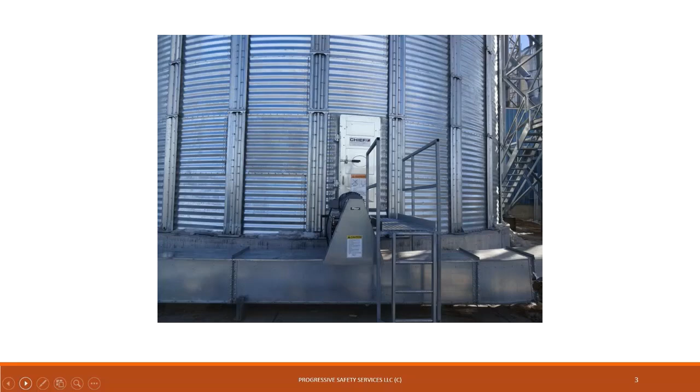I don't know the exact date of this. I'm going to say it was probably 3 to 4 years ago. One of my clients had a facility constructed. I think it was 6 steel bins, tower, conveyor, and all the associated equipment. And what had happened, and I was actually out in that state when this happened, wasn't at the facility but at another location.

After they constructed the bin, they installed the sweep auger, and before they put any grain into the bin, the company that they hired, the design build firm, had several employees that were working to see if the sweep auger was actually going to track properly along the bin floor.

I'm going to be real general because I don't want to get any of the details or give you the wrong details, but from what I understand and what I recall of the incident, they had one person that was located inside of a power room that was a distance away from the outside of the bin. They had a person right outside of the opening or the access point to the bin, and the supervisor or the foreman was inside the bin.

And they were using, I believe, verbal communication and some hand signals to turn the sweep auger on and off to see if it were tracking properly. The supervisor at the point where he was injured was actually straddling, from what I understand, the sweep auger, and it pulled one of his legs into the sweep auger and kind of wrapped his lower leg around the shaft.

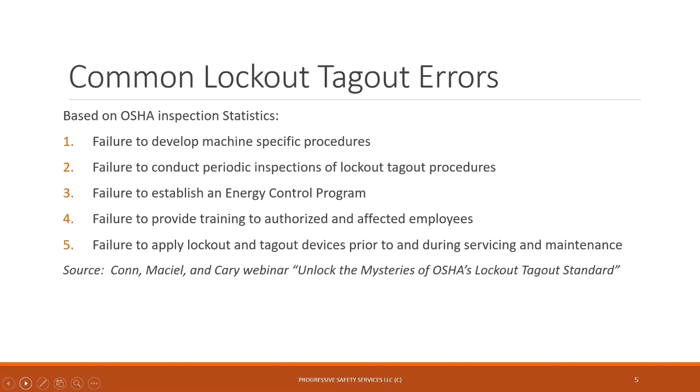And the fifth is just basically failure to apply lockout tagout in instances where there's servicing or maintenance. So I would encourage you to check out that webinar. It covers a lot of the compliance issues in a little bit more detail than we're going to cover today. I thought it was excellent. So again, that's on their website.

So what is lockout tagout? It's specific practices and procedures to safeguard employees from the unexpected energization or startup of machinery or equipment, or the release of hazardous energy during servicing and maintenance. So you'll see this term unexpected and servicing and maintenance quite frequently, and we'll talk more about that as we go through today's webinar.

But one of the things in the Conn, Maciel, and Cary webinar that I found interesting is that the word unexpected is italicized in OSHA's standard. And I believe what they mentioned was it's the only word that was italicized in the standard, which is meant to put emphasis on it. And there's actually an effort that's ongoing with OSHA to take out some of the ambiguous words or words that might be a little confusing or be up to the interpretation. But the stance with unexpected is it's truly unexpected.

So for instance, if we were doing some testing on a machine or something of that nature, and they were going to turn it on, normally it would be we were going to remove a guard, something like that, and the person was in the area and they were warned in some manner, whether it's an audible alarm, somebody on a handheld radio, flashing lights that the equipment was about to start, that is not really deemed as unexpected.

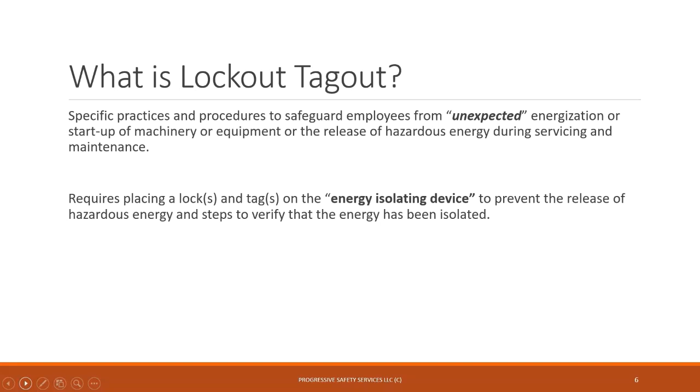The second piece here is, it requires the placing of locks and tags on an energy isolating device to prevent the release of hazardous energy, and then have steps to verify that the energy has been isolated. So when we talk about an energy isolating device, this is another term that's common. It's a definition. It's the device that physically prevents the transmission of energy. So energy can come in many forms. Most commonly, we deal with electrical energy, so it might be something like a circuit breaker or an on-off disconnect. It could be a valve for pneumatics or hydraulics as well. So that's what an energy isolating device is.

So the standard covers a lot of what we call servicing and maintenance. Again, that word unexpected comes up as well. And really the focus here is to prevent harm to employees. Things like the injury that we just talked about. You may be aware of amputations that have happened because somebody didn't lock and tag out a piece of equipment and it unexpectedly energized, and even death.

So, in my career, I had one incident, and it occurred probably 5 years ago now, where an employee entered a grain tank. It was a hopper bottom tank, not too terribly big. They entered without a permit. They didn't get permission from their supervisor to enter. In fact, he told them not to enter, and they decided to enter anyway. And we had a cone bottom tank where one employee, when he got in there, it was wet because they were hosing out the cone to clean out some of the material.

And he slid down into the bottom of this hopper bottom tank, and there was a clean out auger there that was unguarded and running. Normally, in the past they had filled out permits, and there's always a checkbox on there for locking and tagging out equipment. In this instance, they failed to do that. This employee's leg was caught in that auger, and it took his leg clean off of his body. I'd never seen photos quite like it, the photos immediately after the incident.

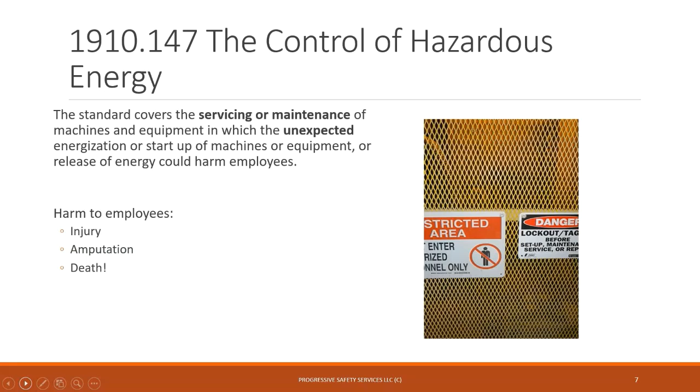So again, those are the bigger picture things that we're trying to prevent here. We're going to talk about compliance, but that's really the ultimate goal. When we talk about energized energy sources, that can mean anything connected to an energy source or containing residual or what we call stored energy. So there are stored energy systems as well that we need to be concerned about when we perform lockout tagout. And common energy sources include electrical, mechanical, hydraulic, pneumatic, chemical, thermal.

There's other springs, gravity, but there are a lot of different energy sources out there. I think, commonly in our industry, there's still a lot of equipment that you can lock out successfully with just an on-off disconnect. But there is also equipment out there that can move or shift unexpectedly as well, because there are other energy sources present.

I think they were actually just cleaning up some residual material, but they were obviously trained, because when we do an inspection and see something like this, the first question that we ask is, is it locked out? Because we've removed a safety device or a guard, in my opinion, the top cover. And we do that not to try to place blame on somebody if it isn't, but we also want to note that they're doing it successfully.

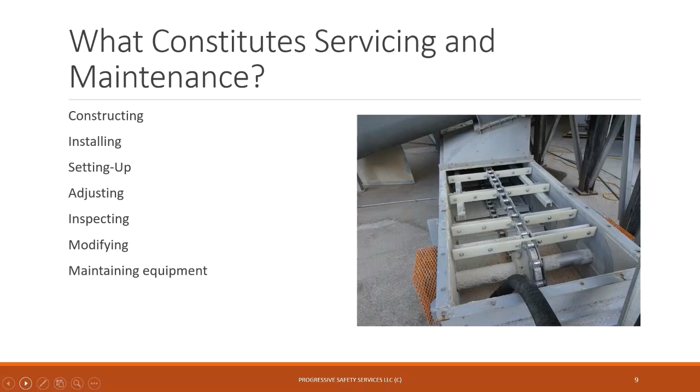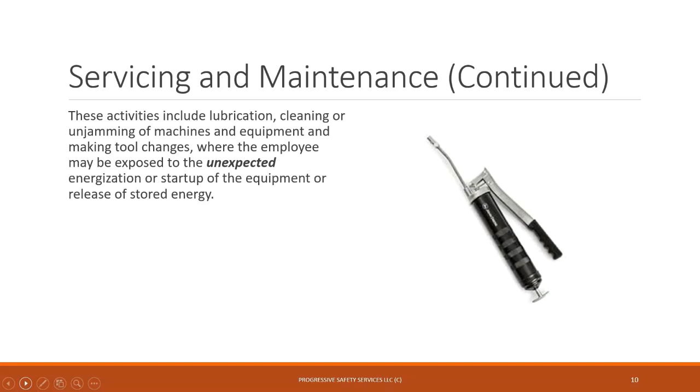So when we went to the energy isolating device for this, we found that it was locked and tagged out by a number of people using group lockout to perform this task. So they were doing cleaning, which is servicing and maintenance. Some of the other activities that would be lumped into servicing and maintenance might be lubrication, cleaning or unjamming of machines and equipment, making tool changes, and anywhere where the employee might be exposed to the unexpected energization or startup of equipment or release of stored energy. So that's during servicing or maintenance.

There are also normal operations. When the equipment in that picture I just showed you is normally operating, there's a cover over the top of it, and it prevents anybody from coming into contact with the hazard. So normal production operations aren't covered by the standard, but servicing or maintenance which takes place during normal operations is covered if an employee is required to remove or bypass a guard or other safety device.

So like the instance that we just talked about, if that cover is on that equipment, an employee can work around it. Obviously, in normal production, he's protected. No need for lockout tagout. However, if they're performing servicing or maintenance type operations and they remove or bypass that guard or other safety system, it has to be locked and tagged out.

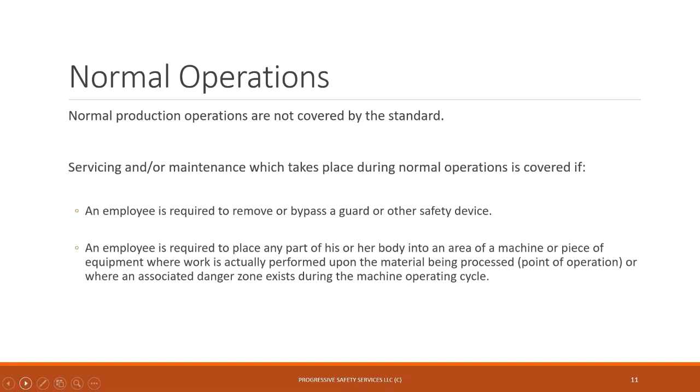Or anytime any employee is required to place any part of his or her body into an area of the machine or piece of equipment where work is actually performed upon the material being processed. That's what we commonly refer to as the point of operation, or when an associated danger zone exists during the machine operating cycle. Commonly when I think about point of operation, I think about a part or a piece of material where work is being performed to it, a hole punch or something of that nature. But although we're not really processing in all of our grain operations, with all this equipment that we use to move material, if somebody's required to place their hand or anything in that machine or somewhere into that hazard zone, lockout tagout would be required.

Now there are several exceptions to lockout tagout, two that I believe we'll speak of today, where lockout tagout is not required. Your company may not choose to honor any of the exceptions. So just as an example, I have clients that have what we call minor intervention language within their policy, and I have others that don't. Generally, the first exception I'm about to talk about is often used in production environments, and I'll give you some examples of that.

So there's an exception to performing lockout tagout during minor tool changes and adjustments and other servicing activities which take place during normal production operations. They're not covered if they are routine, repetitive, and integral to the use of equipment for production. And that's provided that the workers perform them using alternative measures which provide effective protection.

So in an effort not to confuse today, I'm going to give you an example of something that's routine, repetitive, and integral to the use of equipment for production. I've worked with several companies that have bagging operations, and they'll fill bags of all different sizes with flour, fertilizer, whatever it might be.

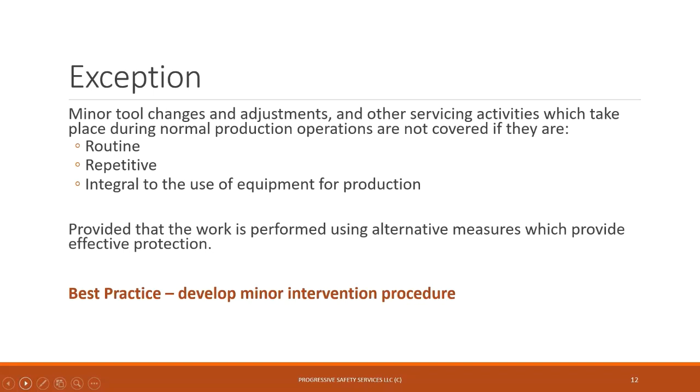In many grain operations, conveyors and bucket elevators are a little different than production, so I'm not sure how much the exception would apply to that. But if you do have production-type operations at your facility, that exception does exist.

The second one is the standard does not apply if somebody is working on cord and plug connected equipment for which exposure to the hazards of unexpected energization or startup can be controlled by unplugging the equipment from the energy source. The plug has to be under the exclusive control of the employee performing the servicing or maintenance. They have to have the plug close by or be able to prevent anybody from plugging it in while they're working on it.

There's an exception for hot tap operations and things of that nature. Quite frankly, I don't get into that line of work, but I did want to just mention that.

With cord and plug equipment, exclusive control would mean, for example, a small portable conveyor that you plug into the wall. If the cord runs around the corner and down the hallway to the plug while I'm working on the equipment, that isn't exclusive control. But if I have it in my immediate work area and could prevent somebody from plugging it in, I could most likely use the exception.

I want to make sure people understand this exception is only for corded equipment. That doesn't mean if somebody removes a guard on a V-belt drive with the on-off disconnect right next to them, that since they have exclusive control and could prevent somebody from turning it on, they could use this exception. They cannot. This is only for corded equipment.

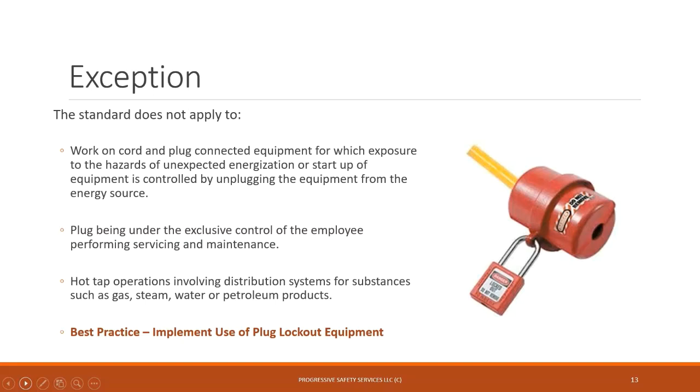So the best practice, in my opinion, is we train on this and really encourage our clients to use cord or plug lockouts for a number of reasons. One is the instance we just talked about — it can be very difficult to make sure the plug is right next to the person so they can prevent that. But also, in the event the servicing or maintenance doesn't get completed during that shift, if there's a plug lockout on it, somebody will not use it because the machine might not be safe to use. So that's one of the reasons as well.

I thought for today's presentation we'd take little breaks throughout, and I could give you a 1-minute focus on some incidents that have actually occurred out in the workplace. So I picked a few of them. I got these right off of OSHA.gov.

These are scenarios where people were actually cited for lockout tagout related incidents. The first one: at 10:15 a.m. on December 12, 2017, an employee was working for a firm that produced converted paper products, an example of slit and twisted paper. He was working with a twisting machine. While the machine was still running, he removed the guard from a pulley-driven belt to check the belt. He was using his hands to push the belt to move faster. When his finger got caught in the pulley, he sustained an amputation of the ring finger on his right hand. He was not hospitalized for that.

So another example where we had a person who removed a guard on a piece of equipment, and based on the definitions that we looked at earlier, lockout tagout is required when that happens.

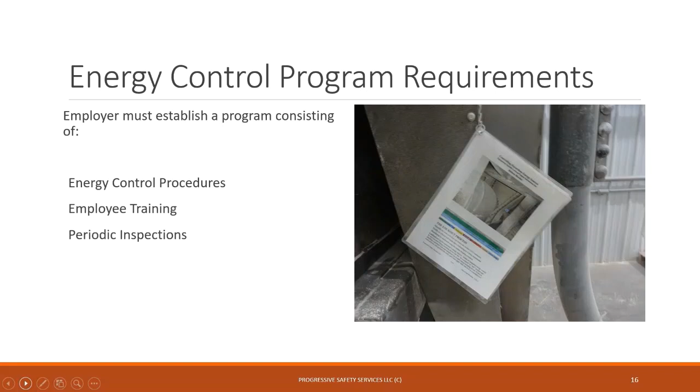So let's talk a little bit about energy control programs. Keep in mind that when I talk about the programs today, your company may go above and beyond what we discuss, and that's excellent. I'm going to talk about the things that are actually required from the actual OSHA standard. So the energy control program must consist of primarily 3 things. You may have additional things in there like provisions for contractors, but it must include energy control procedures, employee training, and periodic inspections, and we're going to talk about each one of these.

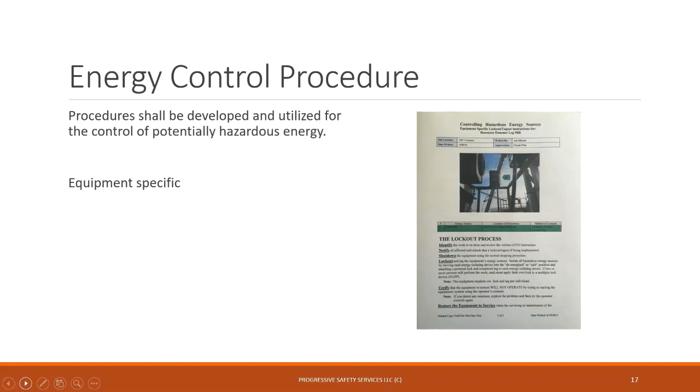Procedures shall be developed and utilized for the control of potentially hazardous energy, and they should be equipment specific. So the common question we get is, how do I know if I have to have an energy control procedure specifically for that piece of equipment? There are actually 8 criteria here, and if your equipment meets all of these, you could have a more general type procedure that you could use at your facility.

If it doesn't meet all of these criteria, then you would have to have an equipment-specific procedure. So it's really looking at the machine and then taking it through these questions or a matrix and determining whether or not it needs an equipment-specific procedure.

So the exception to having equipment-specific procedures, again, you'd have to meet all of the following: the machine or equipment has no potential for stored or residual energy or reaccumulation of energy after shutdown - if you have stored energy with the equipment, it automatically has to have an equipment-specific procedure. The machine or equipment has a single energy source which can be readily identified and isolated. The third is the isolation and locking out of the energy source will completely de-energize and deactivate the equipment.

The fourth is the machine or equipment is isolated from the energy source and locked and tagged out during servicing or maintenance. A single lockout device will achieve a locked out condition. What they mean by a single lockout device is I would have one lock and tag on an energy isolating device like a breaker. If I had to place one on the disconnect electrical, and then I had valves or pneumatics, hydraulics - that's a different story. That would require an equipment-specific procedure.

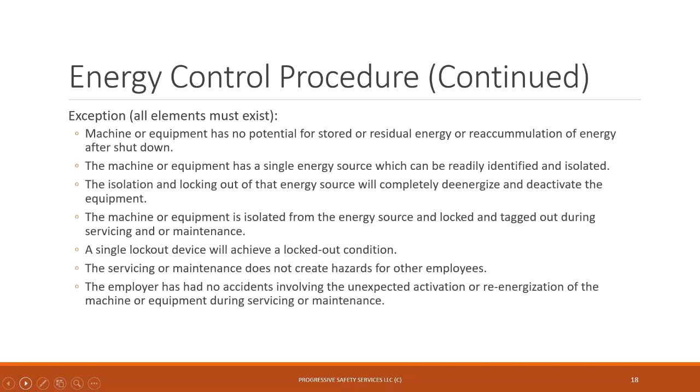If energy-controlled procedures are required in the workplace, there are some components that have to be within that procedure. They have to clearly outline the scope, purpose, authorization, rules, and techniques utilized to control the hazardous energy, a specific statement of the intended use of the procedure, specific procedural steps for shutting down, isolating, blocking, or securing machines or equipment to control hazardous energy, and specific procedural steps for the placement, removal, and transfer of lockout devices, tagout devices, and other energy control measures.

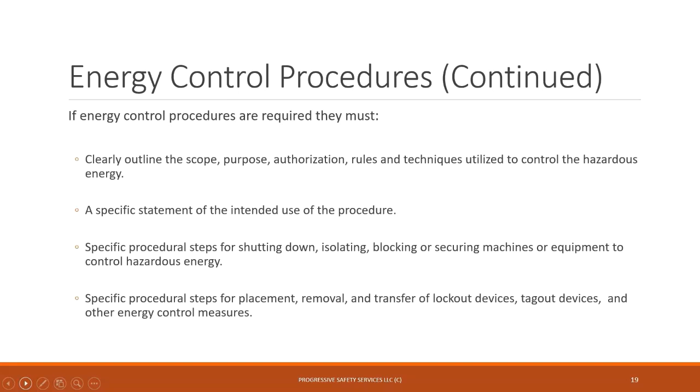So this is just a generally accepted lockout tagout procedure that we use to get started with folks. We use a 7-step process, and then we use a 5-step process to put something back into service. So altogether, our process is 12 steps.

Your company may have less, they may have more. This is, again, just generally accepted.

Step 1 is to notify affected employees. Those are folks that might operate a machine, might just be the equipment operator on which that piece of equipment is going to be serviced or maintained, or maybe they work in the general area or are required to work close to or around. So we notify them. We identify the type or types of energy associated with the equipment.

We shut down the equipment using normal operating means, stop button, PLC, something like that. Deactivate the energy isolating device or devices. We place those in an off position. We lock and tag the energy isolating devices, dissipate or restrain any stored energy that might be in the system. And then number 7 is we verify that the equipment is disconnected from the energy source.

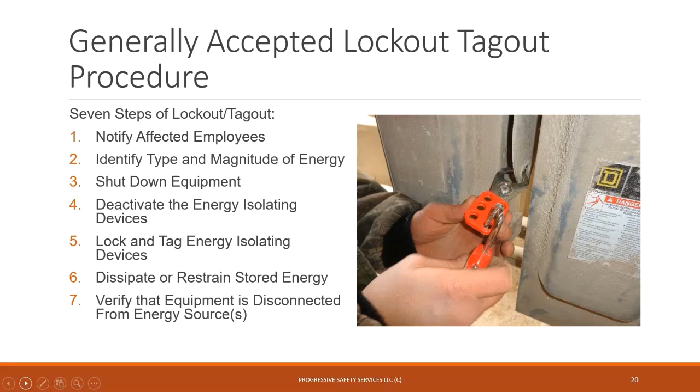So lockout, tagout, try. I find if I can get employees to just remember that quick saying, particularly with the try. So we really focus a lot with our training efforts on the verification piece. It's so important.

With a lot of our equipment, it can be as simple as pushing a start button. Now, when we remove the equipment and re-energize something, we have a 5-step process that we follow. We want to make sure that the equipment is operationally intact. We check the work area to make sure that it's safe, everything's picked up, guards are back in place, all those types of things. We verify that the controls are in neutral if there's the possibility of what we call hard start. We remove our lockout tagout devices, and then we will notify at the end of the servicing and maintenance when the devices are removed that it's safe to work in the area. The equipment has been released back into service.

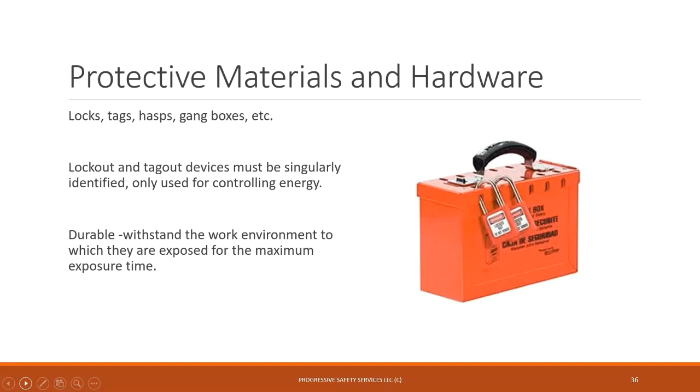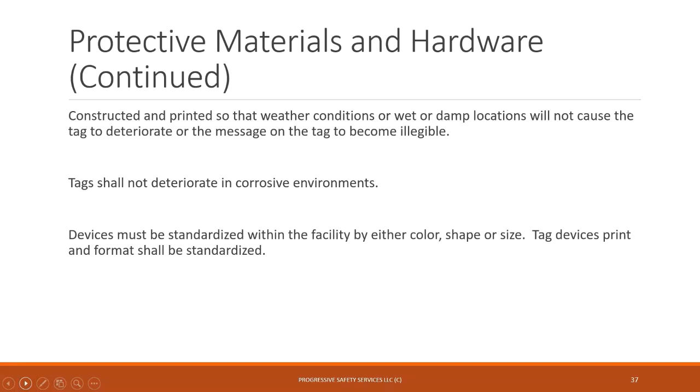This equipment has to withstand the work environment, weather conditions, all those types of things. It has to be constructed and printed so that weather conditions or wet or damp locations will not cause the tag to deteriorate. Tags shall not deteriorate in corrosive environments, things of that nature. And devices must be standardized within the facility by either color, shape, or size. And tag devices' print and format shall be standardized as well. So generally, again, we see lockout locks that are red, they're standardized.

The equipment should be substantial enough to prevent removal without the use of excessive force or unusual techniques. That would be using bolt cutters, maybe some type of cutting tool like a hand grinder, something of that nature. The tagout devices have to be substantial enough to prevent inadvertent removal. And again, they have to be identifiable. So lockout and tagout devices must indicate the identity of the employee applying the devices.

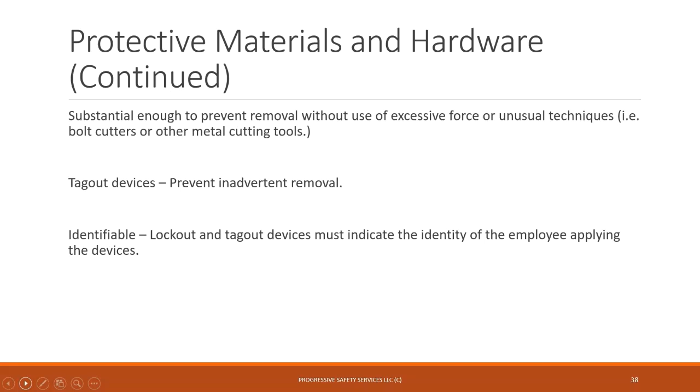So I have been aware of some citations that have been issued where folks maybe just used a tag, or just used a lock to lock something out without a tag, or they used a lock and the tag was not identifiable with the person's name or some type of identifier. And that's really important as well in the event that somebody leaves a lock on a piece of equipment.

So locks and keys, there's a number of ways that you can purchase them. You can order them with one key. You can order them with two keys that are duplicate keys. But they must be designated for one user. So the company's policies will be different regarding this. I work with companies that say, no, we're going to order locks with one key and we'll assign the employee their lock and key, and that way nobody else has a duplicate key so that somebody else can't remove their lock.

And then I work with employers as well that say, no, we order them with two keys. The second key is secured in a locked box or a cabinet. And we would only use that after going through our device removal procedure or permit, and that would only be used by maybe a maintenance manager or facility manager, something of that nature. I think either one of those is fine as long as there is an effective program or policy with that. The last thing you want is keys kind of floating around where somebody else can get their hands on them.

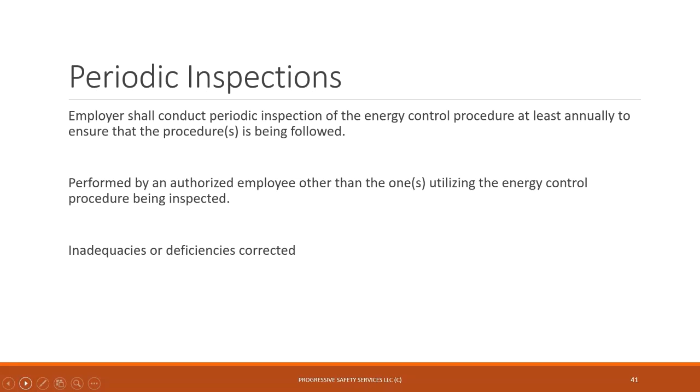It talks about, can you group pieces of equipment together, and it gives you some stipulations that you could, as long as the lockout tagout procedure is very similar, same type of energy isolation, same type of energy isolation devices, those types of things. So that can make it a little bit easier for you. But again, that's similar pieces of equipment. If they're not, they would have to be inspected as well. So in my experience, this is one of the most challenging things that companies probably aren't as compliant with as the rest of what we're talking about today, the actual inspection process.

So the periodic inspection must also include a review between the inspector and each authorized employee of that employee's responsibility under the energy control procedure being inspected. And then the inspections, as like anything, they need to be certified. So within the standard, they tell you what that means. And the certification means it's the identity of the machine or equipment, the date of the inspection, the employees included in the inspection, and the person performing the inspection.

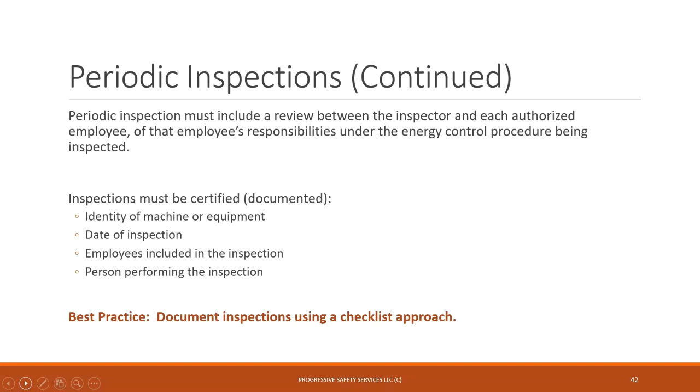So a best practice for inspecting your procedures, at least annually, it says routinely or at least annually, is to have a checklist approach. So the inspection checklist that we use is just a series of questions that the authorized person will ask the team as they're out there and review as they're going through their lockout tagout, just to make sure. If there are any deficiencies at that point in time, he will review that with them and then make a determination whether or not they have to have some additional training as well. So it's best to have a document for that as well.

Which leads us into our next topic, which is actually the training side of lockout tagout. So really the focus of training needs to be the purpose and the function of your company's energy control program. And we have to ensure that employees have knowledge and skills required for the safe application, usage, and removal of energy controls. So the training must include recognition of applicable hazardous energy sources, the types and magnitude of energy available in the workplace, and the method and means necessary for energy isolation and control.

And there's really two different characterizations or types of employees that need to be trained. There's an authorized employee and an affected employee. So the common elevator that I go to, anywhere from 5 to 25 employees generally, maybe less, maybe more. Generally, everybody's authorized to perform lockout tagout. I do have clients. I have one in Northeast Ohio that only authorizes certain people to perform servicing and maintenance on equipment. And the rest of the folks that operate those pieces of equipment or those machines do not perform servicing or maintenance, but they are affected. They're considered affected employees. So there's two different types of people today that need to be trained. If you authorize everybody, it makes it really simple. If you have affected employees, you can have a short basic training for them.

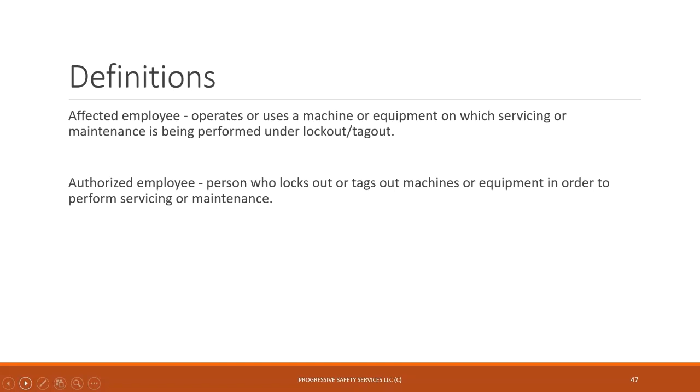So an affected employee, again, operates or uses a machine or equipment on which servicing or maintenance is being performed under lockout tagout. And an authorized employee is a person who locks or tags out machines or equipment in order to perform servicing or maintenance. So when we look at an authorized, requirements include they have to have knowledge and skills for safe application, use, and removal of energy isolating devices, hazardous energy source recognition, the type and magnitude of hazardous energy sources in the workplace, and then training on the energy control procedures within the workplace as well.

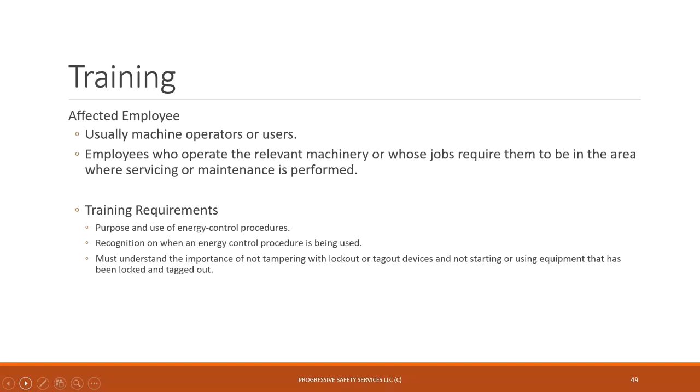An affected employee, again, is usually a machine operator or a user. They operate the relevant machinery, or their jobs require them to be in the area where servicing or maintenance is being performed. So the training requirements for an affected employee are the purpose and use of the energy control procedures, how to recognize when energy control procedures are in place, and then the importance of not tampering with or removing lockout tagout devices. So it's just some basic training with them. We generally get that done pretty quickly, less than a half hour.

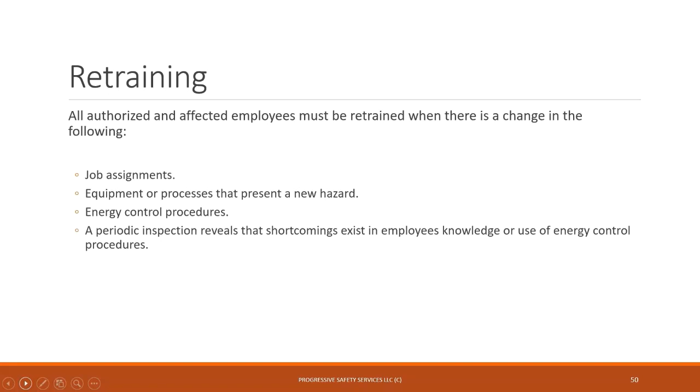And then retraining needs to be conducted with employees whenever there is a change in any of the following: their job assignments, equipment or processes that present a new hazard, changes in energy control procedures, or again, if a periodic inspection reveals that there are shortcomings in an employee's knowledge of the lockout tagout procedures themselves.

So this will be our last one-minute focus here today. We're going to hit on our last incident. So employee number one on June 19, 2018 at 12 p.m. was servicing a mobile conveyor. The employee was found later that evening with his leg caught in the conveyor under its sprockets. The conveyor was not running when he was found, but the key was in the controls. The conveyor had not been locked out during servicing activities, and the throat opening guard had been removed to allow the maintenance work to take place. The employee was pronounced dead on the scene. So again, we have another one where a guard was removed and servicing and maintenance is being performed without lockout tagout.

Okay, let's get into device removal. So a company may address this in several different ways. There are some companies that say that, hey, if somebody leaves a lock and tag on a piece of equipment and they leave for the day, they have to come and remove it themselves.

But there is an exception that an employer may use. So generally, under normal conditions, each lockout or tagout device shall be removed from an energy isolating device by the employee who applied it. However, there is this exception that the employer may use. When the authorized employee who applied the lockout or tagout device is not available to remove it, that device may be removed under the direction of the employer, provided that they meet the following.

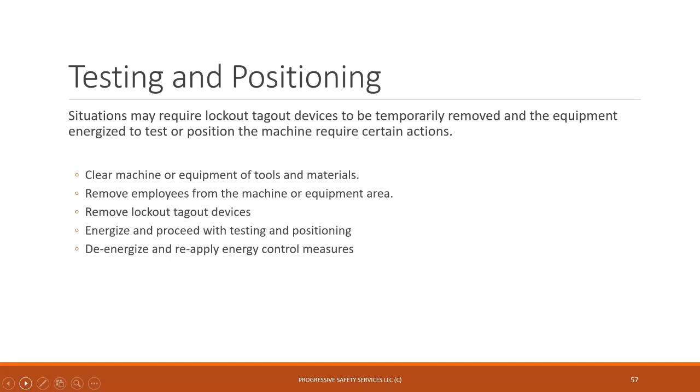control measures as well. Again, I'm aware of companies out there that do not use an exception like that as well. So that's up to your company. Wanted to touch on group lockout, very important. This takes place when there are situations where servicing or maintenance is performed by a crew, department, or group, and a group lockout device must be used, something like a hasp or gang box, something of that nature.

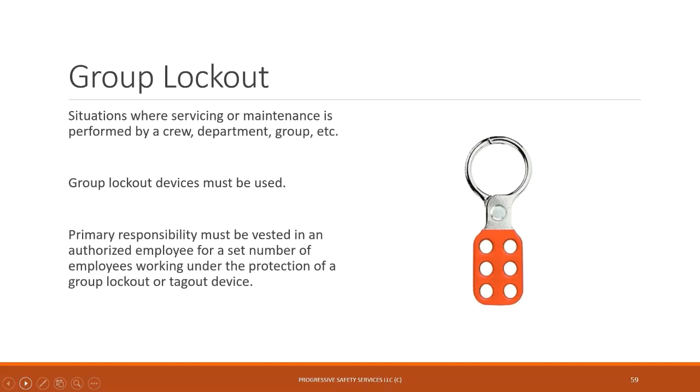So primary responsibility in a group lockout must be vested in an authorized employee for a set number of employees working under the protection of the group lockout tagout device. So when we have multiple people that are working on a piece of equipment, there's one authorized employee who takes kind of responsibility for that lockout tagout.

That authorized employee must ascertain the exposure status of the individual group member with regard to lockout or tagout of the machine. And each authorized employee shall affix their lockout tagout device to the group lockout device when he or she begins work and remove those devices when he or she stops working on the machine or equipment.

So I have a client that they have to scrape elevator leg buckets to clean them in between product runs. Supervisor, usually three employees in separate areas along the leg that work on this. Supervisor puts his lock and tag on the hasp along with all of the other employees involved in the operation. As each one is done with their individual job, they remove their lock and tag. The supervisor is the last one to remove his lock and tag after he's inspected the equipment to make sure that it's safe to be put back into service.

Pretty simple process. If you do have shift or personnel changes, continuity of lockout should always be considered. So that continuity of lockout is really provisions for the orderly transfer of lockout tagout between the offgoing and oncoming employees. So it can be as simple as what we call a handoff.

We use a hasp. I have my lock and tag on the piece of equipment on the hasp. Jim comes in on second shift. He puts his lock and tag on the hasp and I take mine off. You could also have somebody put one on in between the actual exchanges as well. So include language in the energy control program for those types of things.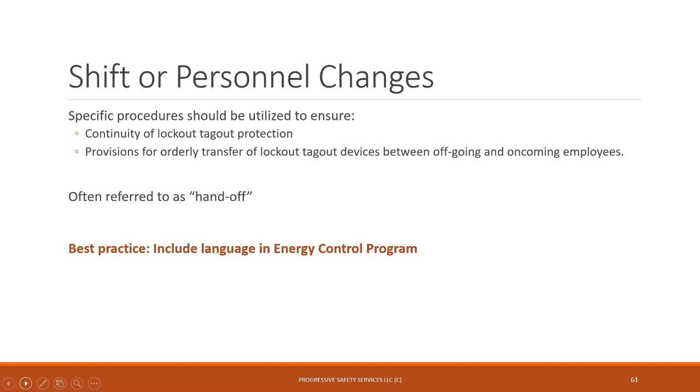With outside contractors, very important, the on-site or the host employer, which would be most of the folks on the line today, and the outside employer have to inform each other of their respective lockout tagout procedures, and then the host employer shall ensure that his or her employees understand and comply with any restrictions and that kind of thing. I think with contractors, best practice, when you go through your contractor safety training, is that there's a checkbox somewhere on your checklist that talks about lockout tagout.

And then one of the things that a lot of our clients do, and we encourage them to do as well, if a contractor locks something out, an authorized person from the host employer will also lock that equipment out as well. And then when the contractor's done, they'll remove their locks, and then the host employer will do an inspection of the area and be the last to remove their locks as well.

Labeling: there are no requirements for labeling to communicate the purpose of energy isolating devices. This isn't something that's talked about in the standard, but it's something that I encourage folks to do as well. I see a lot of different labeling systems out there. A lot of them use common language or directions, west, east, north, south. Just keep in mind when directions are used that you may have a contractor or a new employee or even an employee at your facility who doesn't know the west conveyor from the east conveyor.

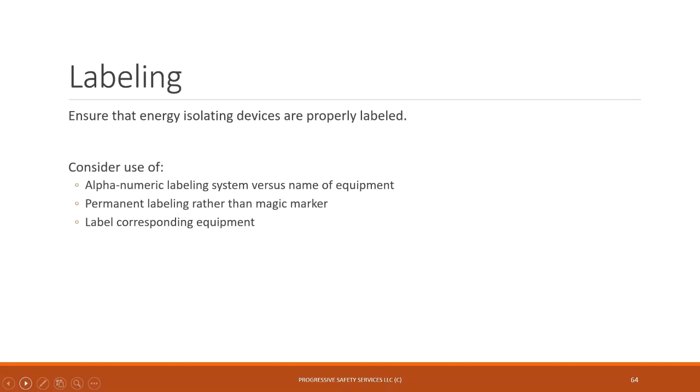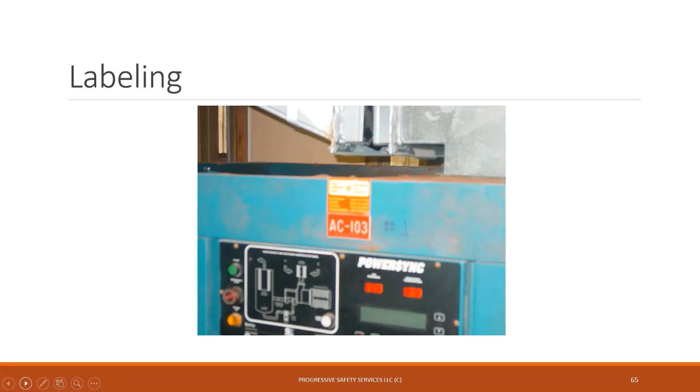So we encourage folks to use an alphanumeric coding system. And I'll give you an example. I've been using these pictures for 15, 20 years now. This is an air compressor. You can see it used to be labeled number 1. It's now AC 103, air compressor 103. There's 101, 102, 103, 104, and so on. They can quickly look at the identification tag when they're performing servicing or maintenance on this air compressor.

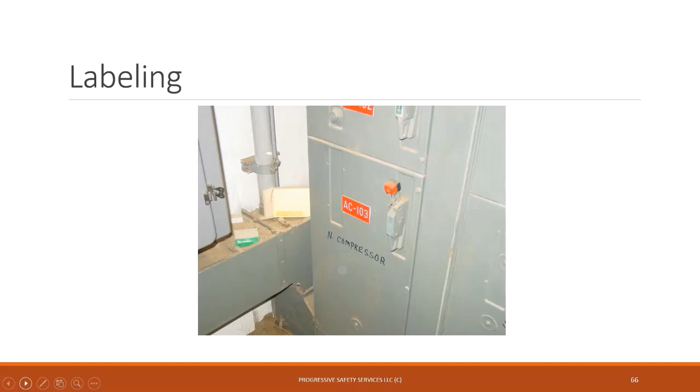When they go into the power room, they just match it up, AC 103. You see that the old system was the north compressor, and the north compressor was labeled number one. The two didn't match up. So it's somewhat of a foolproof system that I encourage people to look at as well.

Obviously, there's the OSHA standard that you can refer to as well, the control of hazardous energy. On OSHA.gov, if you look up numerous questions on lockout tagout under 1910.147 and subpart S, there's a gentleman that wrote in and asked about 10 different questions, a lot of the ones that you probably have right now, and they answered all of those for him. So it's a letter of interpretation that's out there. We have some supervisor talking points that I know Kendall's going to send out to everybody in a quiz if you wanted to do some additional training with your staff as well. And I would also encourage folks, you can always call your local area office and ask questions of the compliance officer on duty. It's something that I do routinely. If you're worried about the office close to you, you can call one in another area of your state. It's all anonymous, you just ask the question. So they can help with some of these questions as well.